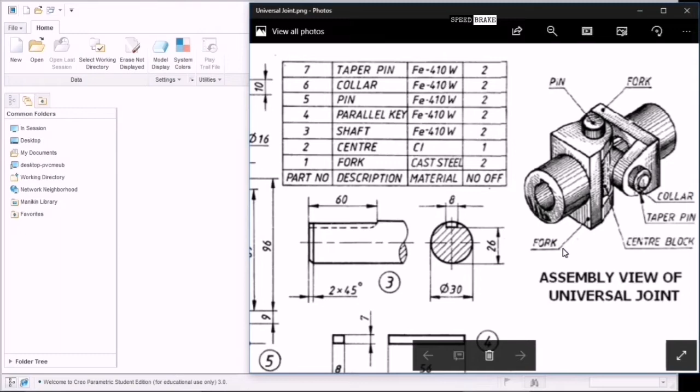This universal joint assembly consists of 7 parts: fork, center block, collar, taper pin, etc. We will initiate with fork, then center shaft, followed by parallel key, pin, collar and taper pin.

First we will try to model this fork in sketch mode in Creo. Let us explore the dimensions of the fork quickly - it is a very simple diagram. First we will model the middle part, which has dimensions of 57, 84 into 16. 57 is the width and 84 is the total length as provided, and extrusion can be provided for 16.

Meanwhile we will make the right hand side part, which is a concentric 2 circle, followed by drawing the back end and providing a fillet and rounds as it is provided, with 3 mm.

New sketch, just uncheck this default template. Before that we will select the working directory, which has all the files in it. I'm creating a new folder on the desktop, naming it universal joint, and creating a working directory. Whenever you are saving all the files, it will be saved in the working directory, and it helps in assembly also. We'll get a message: successfully changed to working directory.

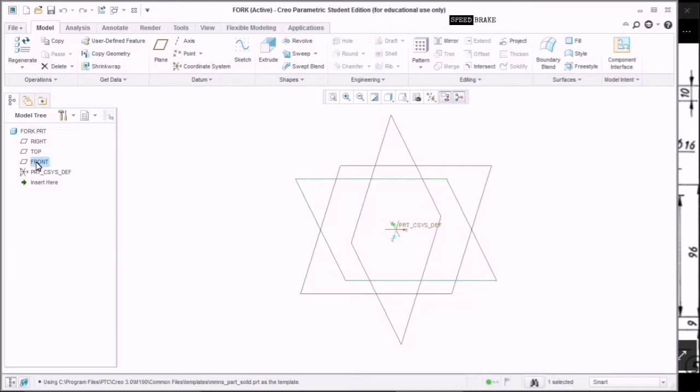Now choose the front plane and sketch view, choose sketch mode and click sketch view. Now we will draw the fork. First one, as I said, it is 57 into 84. Taking the rectangle, I am making it symmetric such that it helps me in assembly.

In assembly view it helps whenever I am trying to make it symmetric. So here it is 57, here it is 84, trying to get it symmetric - so it is 57 by 2 and here it is 84 by 2, such that if you look at this it will be symmetric to x and y axis. It helps in assembly and extruding.

So extruding, even here also the symmetry, extrude on both sides. Extrusion, it is 14... sorry, 16, okay, 16 mm.

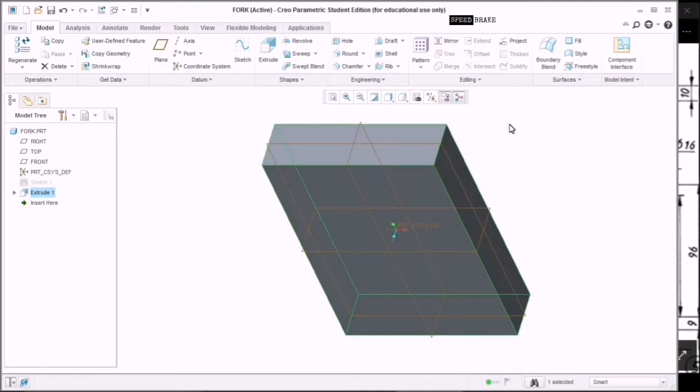Now we will just draw the next one. Sketch view, make references, taking out references. Take the center line such that the circle remains with 18 mm towards the surface - so 18 mm. Since the center line will not meet out and will not make errors, you can also use the construction mode.

So choosing the circle, and the dimension for it is 40 dia and 16 dia. I am making out two circles - so it is 16 and another one is 40.

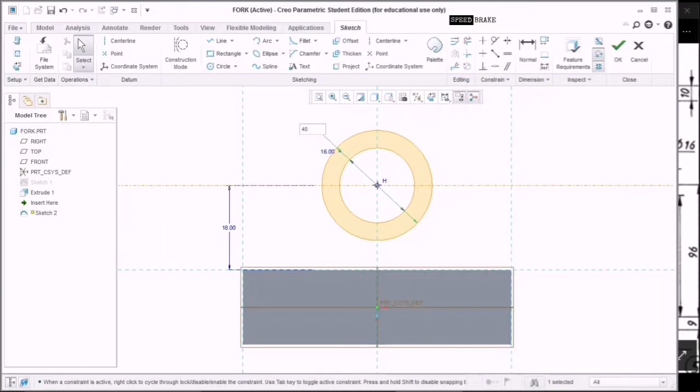Now I have to make a tangent. I have to choose this - it shows a T symbol such that it comes as a tangent. Draw another tangent line with respect to the surface which is already extruded. Now trim the unwanted surface - whatever surface is unnecessary, just remove it using the trim tool, carefully such that it won't affect the tangent line.

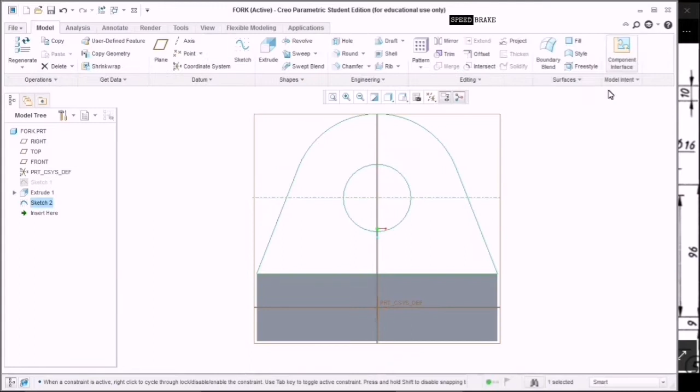Now we have to close the corresponding sketch, drawing a line towards the surface. Now we will extrude it - here extrusion is made on one side only. Switch on the arrow such that it passes to the other direction. So extrusion on one side, it is 14.

Here you could see it is 84 minus 56 divided by 2, such that it is 14 on both sides. So for one side it is 14. I'll also show you can directly input instead of calculating: 84 minus 56 divided by 2, so it is 14.

Next we will take the mirror of it. Select the extrude, choose the mirror option, select the middle plane, and you will get the mirror.

Then we'll model the backside part of the fork where the shaft can be placed. Sketch view.

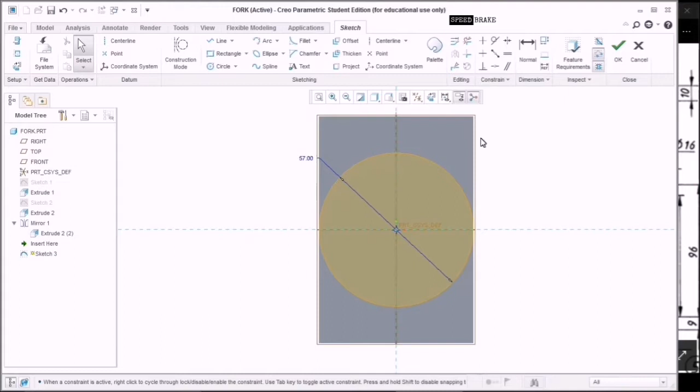Now take a circle - at a midpoint, draw a circle with a diameter of 57, as you could see here it is 57, for the diameter with an extrusion of 38. Extrude it, check for a standard orientation, so extrusion on one side only with 38.

Now we'll make a hole in this as it is represented. Sketch view - a hole of 30 diameter. Here you could see it is 30 diameter hole, so change it into 30 diameter.

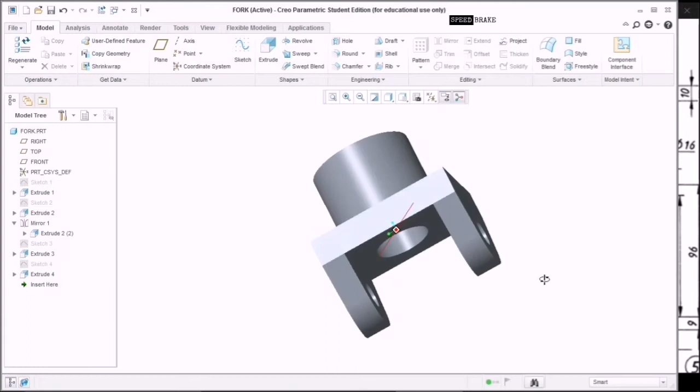So extrude it, look for a standard orientation. And now we have to remove the material. So automatically, if you are dragging it, we may see that material is removed.

Okay, we have almost completed the first component in the universal joint. Now we have to draw the axis for the key, that is, we have to draw the keyway. As it is shown, first we'll take the references for drawing the keyway.

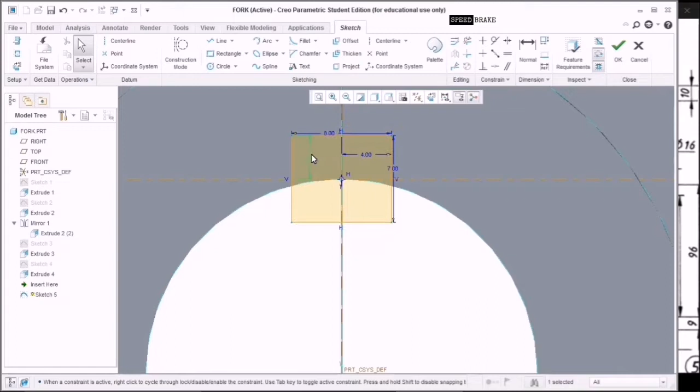Okay, clicking the reference, take the rectangle, and a center line, since the keyway is restricted as 8 into 3.5 mm. So it is 8, and making it symmetric, so it is 4, and this is, I think it is 7. Okay, 7, meanwhile it is 3.5 from the hole which is made.

So now we are ready to extrude and remove the material. So here you could see the keyway which is 8 into 3.5 made here, and the corresponding parallel key which is inserted, which consists of 7 into 8.

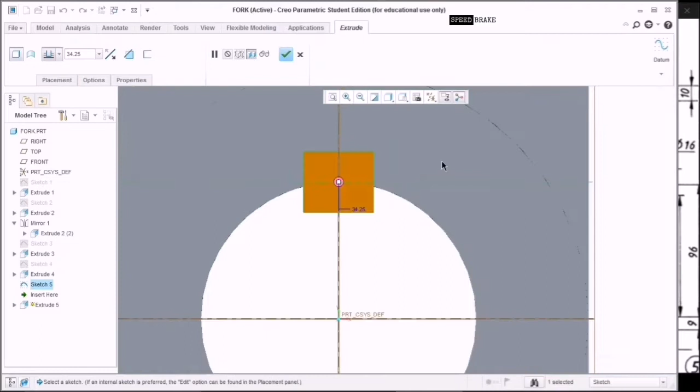So here you could see, okay, 3.5. So instead of 20, there have been some limitations. Clearly it is mentioned the keyway is 8 into 3.5, and that's why we have made it. It is 8, it is 3.5, since it is 7 by 2.

Okay, then extruding it, then switch over the directions, or we'll do this extrude on both sides, drag it and choose remove material, such that our keyway is done.

Then we will make a round. It is provided a round of 3 mm. We will choose all the parts whichever necessary, which requires a round. So it is again round, followed by the corners. Rounding is made in order to avoid sharp corners.

And that's it, we have completed making component 1, which is the fork. 2 forks are used in the universal joint, the same similar fork. Successful.

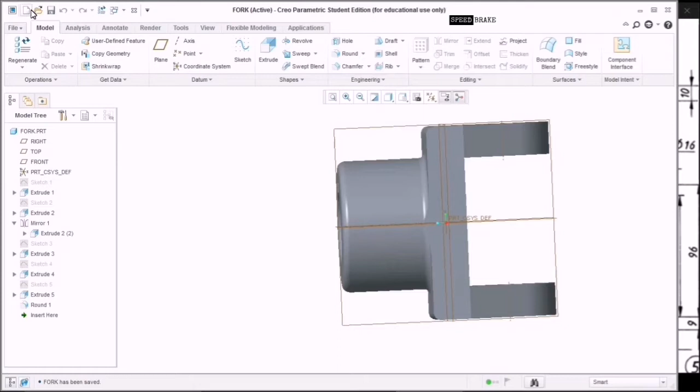So we will move on to the next one. Before that we will save it. Okay, so this is saved to the working directory. So move on to the next one, new part. It is the center block, I will name it as center.

So uncheck the default template, choose the millimeter Newton solid. Again, I'm just naming it, branding it. It is made by me, Ramesh.

So choose the front view, sketch mode, and then the sketch view. So how shall we proceed this? So we have to make 2 circles. One circle is 32 dia, another one is 16 dia.

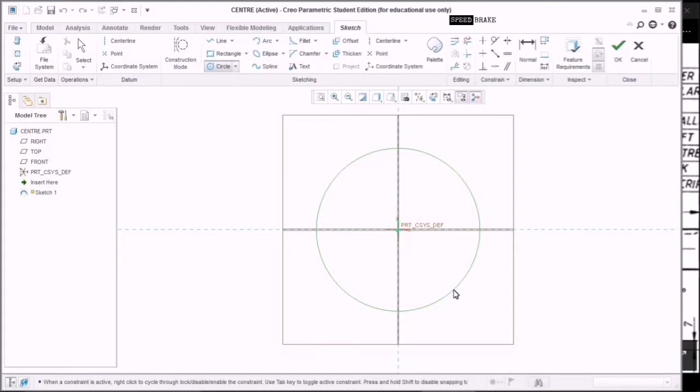And meanwhile we have to extrude it for 56. So first we'll make this center layer, and next by taking 18 as reference we'll do another thing. First take a circle, similarly another adjacent circle. So one is 32 diameter, and another one is 16 diameter.

And this extrusion is made for 56. So okay, click OK, extrude. As I said, symmetric extrude on both sides, it helps in assembly. So it is 56, extrude for 56, standard orientation. Yeah, okay.

So then select the suitable plane, go for the vertical plane. Provide sketch, sketch view. So now make a reference and just provide the dimension as 18, taking the center line as a reference and changing the dimension as 18. Okay, you may witness here, it is 18.

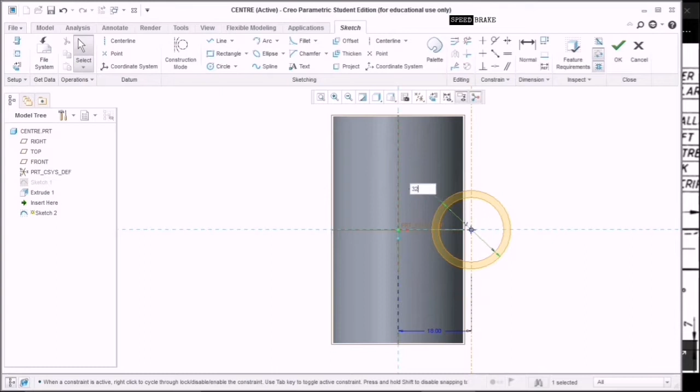So in that 18, continue the same procedures, taking the distance as 18. Draw 2 circles similar to the previous step, one is 32, another one is 16. So it is 32, sorry, 16 and 32.

So now we will extrude this. The extrusion dimension is, as you could see, the previous one. Extrude on both sides. It is 56.

Okay, now we have to remove the inner material, which blocks the way for the pin. So just choose the reference and click OK. Circle, create a circle, click OK, extrude, and then remove the material, extrude on both sides, just drag it.

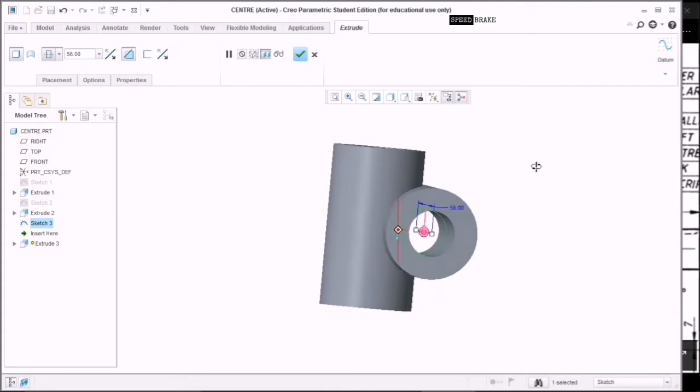Remove the material, okay, I have provided 56. You may also just drag it since we are just removing the material. Do the same one for the other similar center.

Choose the corresponding plane, sketch view, sketch. Reference, click on the center, that is circle. Circle, click OK. Again, extrude, standard orientation. Just remove it, extrude on both sides, remove material. Automatically it is done.

That's all, we have completed the second model.

Okay, now we will save this. Second center is done.

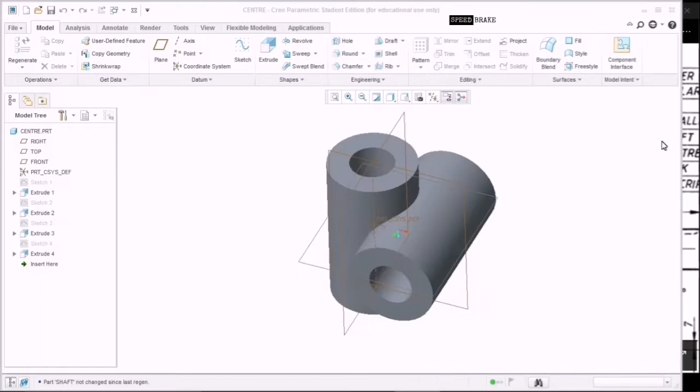The third one, new part. Third one is shaft as provided. Uncheck the default template. Click OK. And it is modeled by Ramesh. Here I made a pass and clicked the corresponding MMNS.

Better you do this. Always prefer to choose millimeter Newton solid MMNS. Otherwise it may go into inches.

We will see here the shaft, it is 30 diameter with the 60, and the other dimension is not provided. We may consider it as 100 or 120. With the chamfer of 2 into 45 degree, chamfer angle of 45, with 2 mm. It is as simple as it is.

Meanwhile, we have to make a key, parallel key. Choosing the front view, sketch view. First let us draw a circle of 30 diameter, and extrude it to 60 plus some 30 or 40. Say it is 100.

Extrude on both sides, symmetric. As I said, it is 60. We may consider plus 30 or 40. So 40. That is 100. 60 plus some space, since there is no restriction with the length of the shaft.

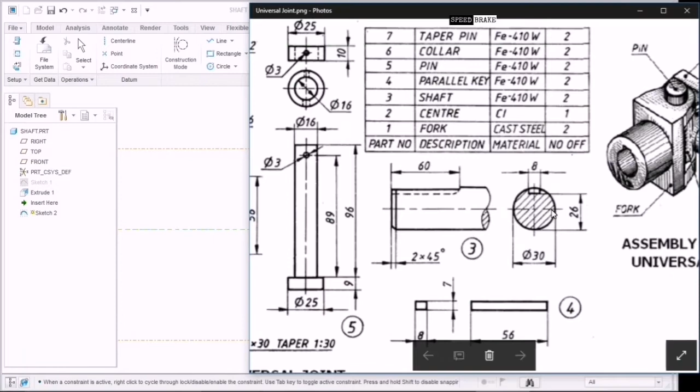I made 2 reference lines, and choosing the dimension by clicking on the 2 reference lines. So it should be 26. As it is mentioned, you could see here it is 26 and the slot is for 8.

So we will take a rectangle here for the 8 slot, making it symmetric. So it is 8 and here it is 4. So it is done. You could see it.

So it is 8 and 4, so that we could provide the key slot properly. Click on OK, extrude.

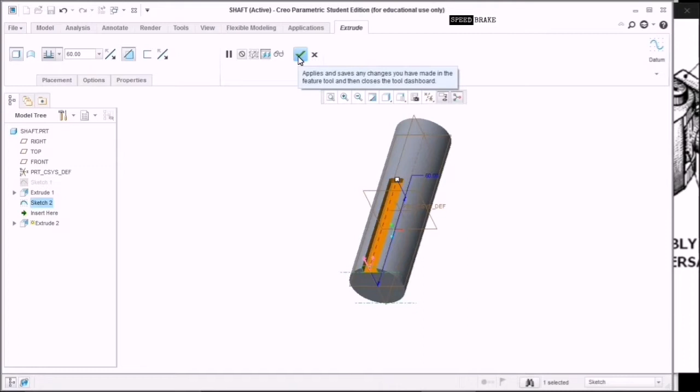Just check with the standard orientation. Change the direction and how long the key slot is to be made. It is 60 as it is provided in the diagram. So the key slot is successful.

So then the chamfer key slot is successful. You could see we have made it for 60, and another is some extra recess. There is no restriction on the length.

So now the chamfer with 2 into 45, angle of 45 degree with 2 should be made. Click on chamfer, here it is 45 into D, it is 2. Click on the edge such that chamfer is made and click OK. And that's it. Shaft is done.

The third component is done. As simple as it is. We'll save it. Yeah, successful.

So we'll move on to the next one. Uncheck the default template, rename it, and obviously the next one is parallel key. Sorry, the fourth one, parallel key. We are making the key.

It is very simple. 7 into 8 and the extrusion is 56. So name it as parallel key. Choose the default template, which is MMNS. Just make your name, it is suitable if you are making it for detailing.

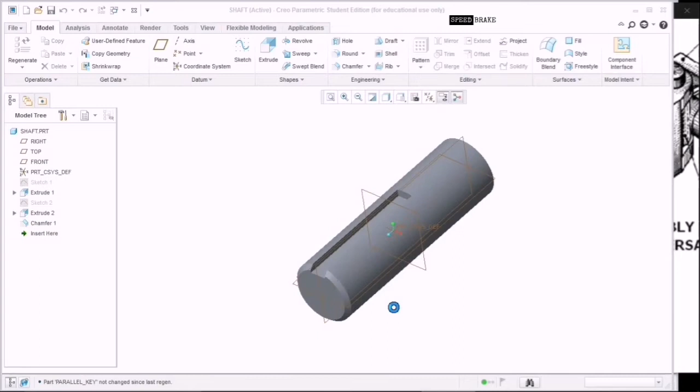Here I have passed and I have chosen the MMNS. Don't think it is in inches. Click on the front plane. Click on sketch view, sketch mode and sketch view.

So now choose the rectangle. It is 8 and 7, make it symmetric. That helps in assembly and that helps in all the other next steps during assembly probably.

So it is 7 by 2, so it is 3.5. And here it is 8 by 2, it is 4, since it is symmetric. Standard orientation, let us extrude this first.

Extrude on both sides, and the extrusion, you see it is 56. Now this is done.

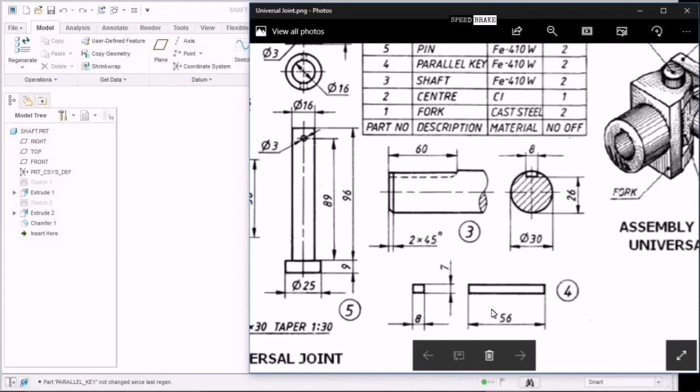Then go for the fifth one, which is parallel pin. Sorry, which is pin. So first let us save it. Save the parallel key.

Click new part, which is pin. Uncheck the default template and choose MMNS. I'm just ensuring to enter my name.

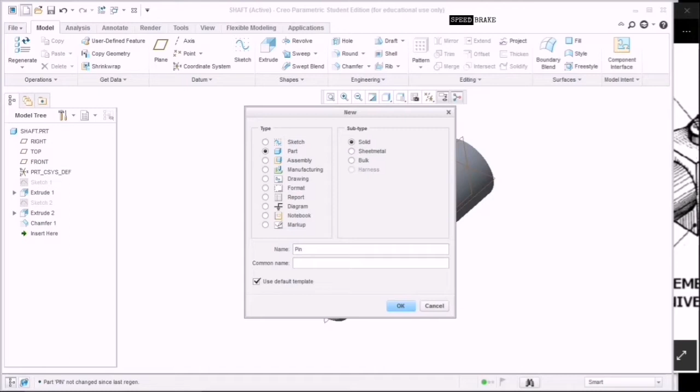Sorry, okay let us pause, because I have to choose that MMNS. I'm forgetting it. So it is pin.

Yeah, MMNS. Don't forget to do this. Otherwise, one part will be in inches, another part will be in millimeter. Okay.

Let's now proceed to model the pin. Okay, pin. So pin first, let us draw the 25 dia and model the top surface by extruding for 9 mm, followed by the bottom surface for 16 diameter. Okay. And I extrude it for 96. Okay. Front plane, sketch mode, sketch view.

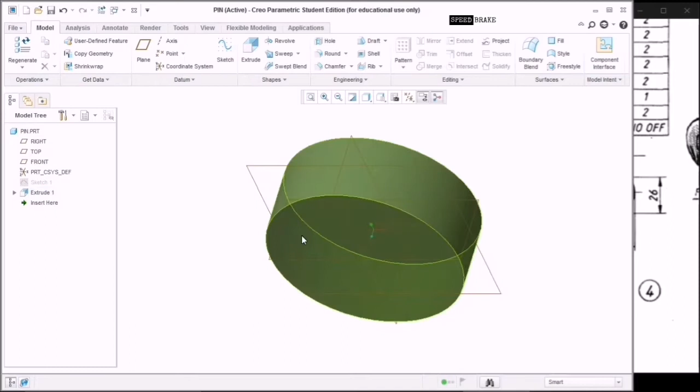Take the circle with a diameter of 25. Extrude it. The extrusion is for 9. Okay. So then let us select the surface of it. Okay, surface with a dimension of 96, with the diameter of 16 mm.

So sketch view, choosing the circle. Let us draw a sketch, changing the dimension as 16 mm. Okay, let us extrude it for 96. Okay, pin is made. So now I have to make a hole.

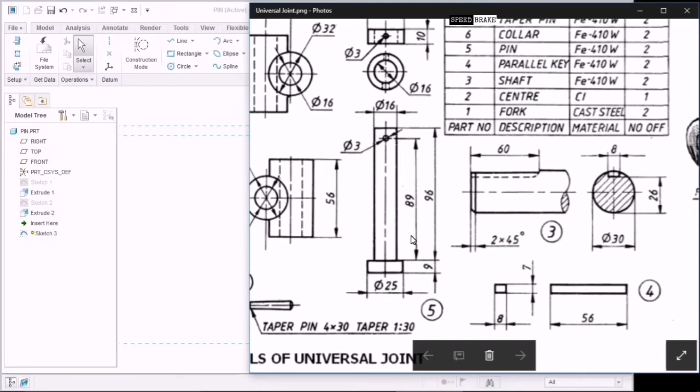You could see a hole of 3 mm dia. It provides space for taper pin to enter. Okay, choose the references. So from bottom I'll make a reference line. So it is 89. You could see it is 89. There I have to make a 3 mm diameter hole.

Okay, so I'll make a reference. I'll choose the dimension, click on the first one, second one, middle button. So it is 89. That makes it easier to make a hole of 3 mm diameter, such that the taper pin can be entered in it easily.

Okay, so extrude it, remove material, and the hole is automatically made, it is 3 mm. You could see. Okay, since it is a hole, I'm just dragging it. Okay, so hole is done, and that's it. We have completed the 5th one, which is pin. Save it. Okay, then click on new. The next part, which is collar.

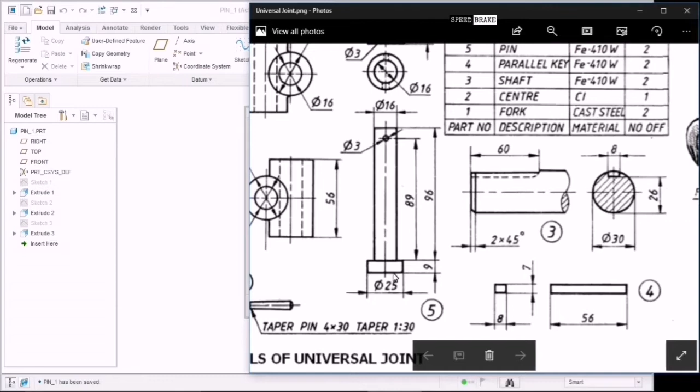So I'm just checking whether pin is correct. Okay, collar. So for collar, you could see it is 16 dia and 25 dia with 10 mm extrusion, and we have a hole for 3 mm diameter, which provides access for taper pin. Okay, it is easy. Let us now model the collar.

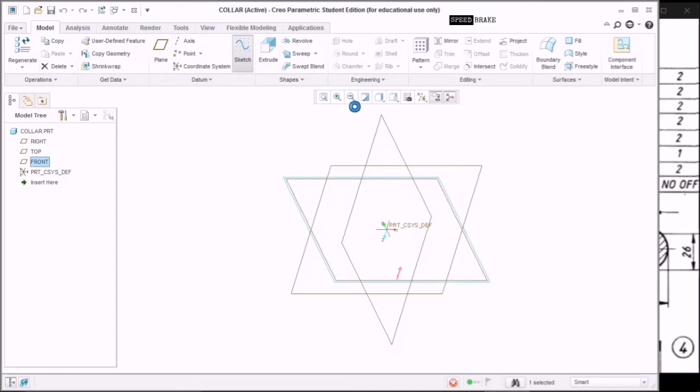We'll extrude it. Okay, extrude on both sides, and it is extruded for 10 mm. Okay, so you could check it is 25, 16 diameter and 10 mm extrusion. Now we will make a 3 mm hole, such that it provides access for taper pin.

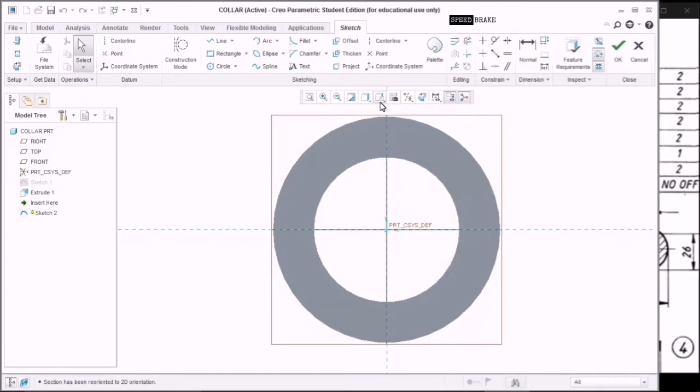Okay, let me check. Yeah, okay. So choose the plane, mid plane, sketch view. Let me check. Yeah, it's fine. Okay, sketch view. I'll click on the circle and change the dimension to 3 mm such that the hole can be made.

Extrude it. Extrude on both sides. Okay, we will drag it. Then click on this remove material. Yeah, completed. The sixth component collar is completed successfully. We will save it. Okay. So now click on the next one and check the default template.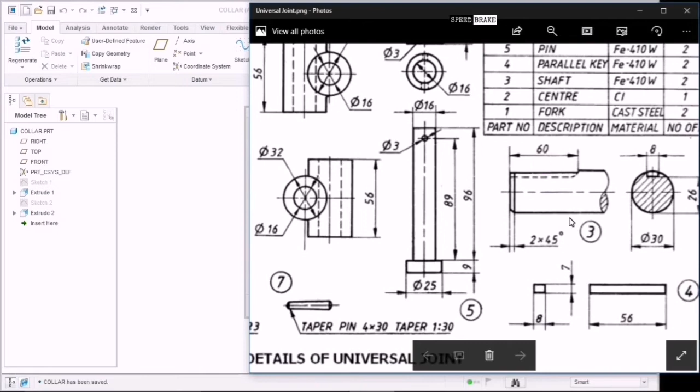Okay, what is the next one? Taper pin. As you could see, the last component. Wait, which is taper pin? Yeah, okay. One second. So for this taper pin, first, let us start. So taper pin is to be provided in order to restrict the motion. So choose MMNS part solid. Yeah, it is needless, but anyway, okay.

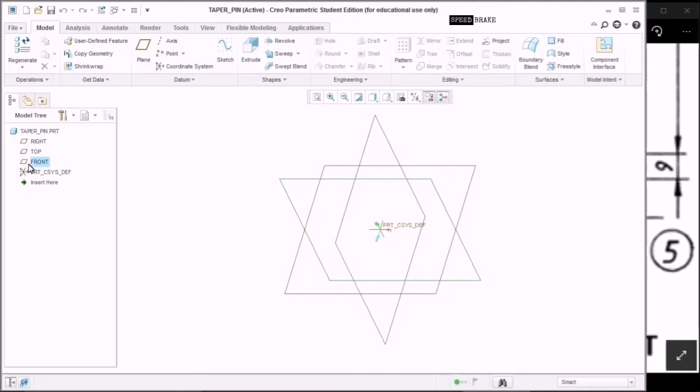So okay, let us enlarge it. So here for drawing the taper pin, you could see that taper pin is made for 4 cross 30 with the taper of 1:30. 4 represents one side dia of it, and 30 is the length. Taper is 1:30, which means for 30 length the taper will be decreased by 1 mm. Okay, so we will proceed.

Okay, so as I said, we will use the revolve command to do this taper. Since it is 4, half of 4 is 2. First we'll draw a line. A small line, and another small line. So this should be 1 mm lesser than the first one. So half of 4 is 2. Since we are making a revolve, we have to consider half of the dimension here.

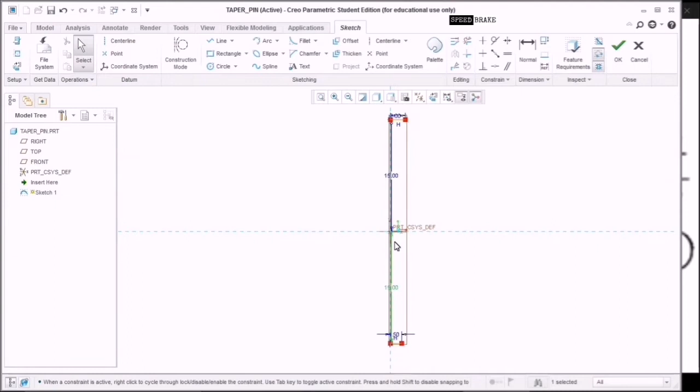And since the taper is provided 1:30, here it is 1.5. Because in the top it is 4, half of 4 is 2, in the bottom it is 3, half of 3 is 1.5. And meanwhile the length is 30. Okay, 15, 15. Anyway, we will again check with the length.

Okay, hope you understood this. We are making a taper. We'll check with the length. Okay, it shows 15, 15. Yeah, 30. That's fine. We'll delete 1. Okay.

So now we will join this using a line. Join the taper. It is a slight taper. Join it. And then connect it. In between there is no connection since it is not a closed surface. I am making a reference center line, in which reference line the revolve should operate, and after that we will connect it.

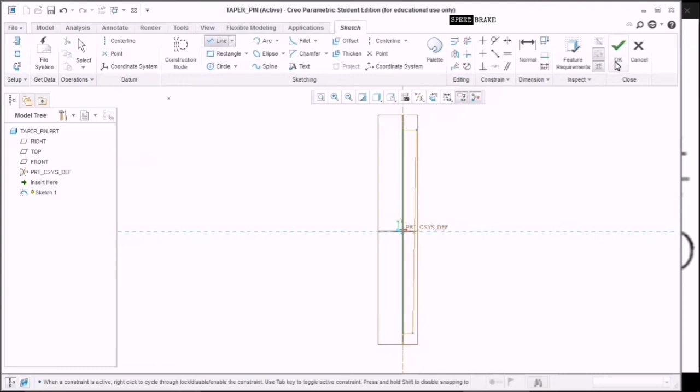Yeah, sorry. Okay, connect it. So now that's done. Click OK. You will just revolve it such that the taper pin is ready. So now we have successfully made all the, yeah, it's running, all the components for the universal joint. We will save it. Okay, yeah, done.

Yeah, what is this? Okay, no. So now we will proceed on to assembly. One sec. You have to proceed with assembly directly. Before that, let me, okay. So click on new and start with the fresh assembly. Yeah, okay.

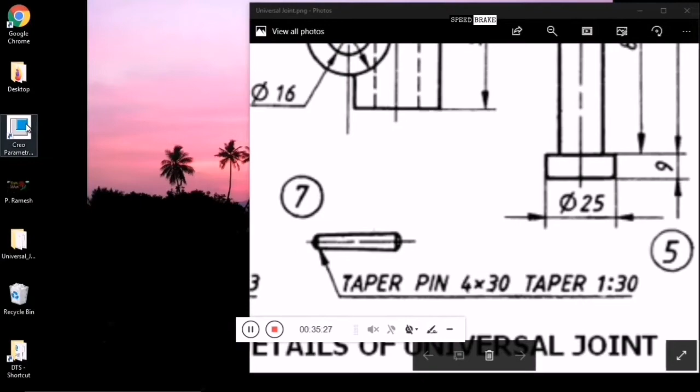I'm checking for some issue. Sometimes Creo Parametric has not been operating. Okay, click on new assembly. So providing the name as universal underscore joint. You have to provide underscore or something properly, otherwise the name will show an error. And uncheck the default template.

I'm just branding it, providing my name. So here choose inches, and here MMNS assembly design, and you may provide your name. Modeled by, and the description, you may provide an optional description such that it will be useful during your detailing process. So click assemble, click the fork and make this the default one such that other elements are framed up based on the constraints of this fork.

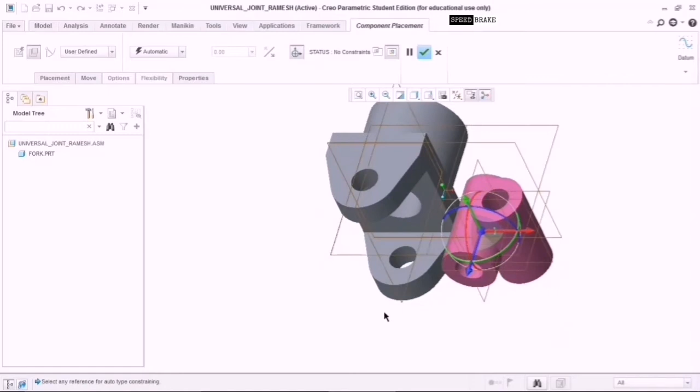Now let us import the center block. Click center and OK. Choose your convenient view such that the assembly is made as simple as possible. To whichever extent it is convenient for you, zoom it and just use the slider to rotate the direction. Click on planes. Vertical plane and horizontal plane, and using the center line or surface.

So my methodology here is based on a vertical plane, a horizontal plane, and either center line or surface in order to obtain the fully constrained option. If it is partially constrained, it won't be a good one because that's not a correct way of assembling it. So choosing the surface and surface, still it is partially constrained. Now choosing the center axis line.

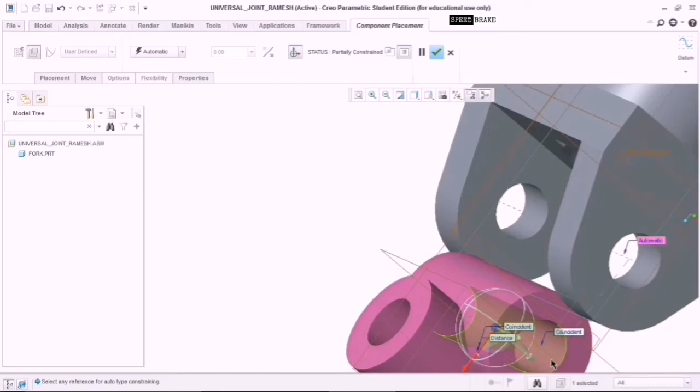Because sometimes even if we click OK fully constrained, it may change its position. So I am restricting it, making it constrained in all directions. Click on the center line and yes, this one, another center line. Okay, so now it is fully constrained. Yeah, clear.

So we will import the next one, the next fork. Click open. So just change the directions using the slider to the corresponding view where the assembly is made. Rotate the slider. So now choose the planes, vertical plane and the corresponding vertical plane of the fork. Make it coincident. And it is 0 dimension.

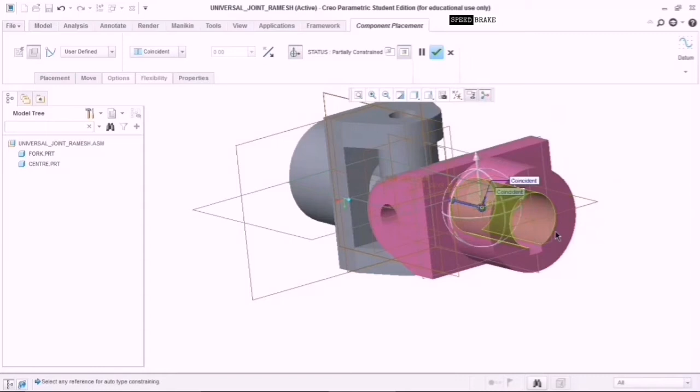So now click on the horizontal plane and the horizontal plane of the existing work-in-process assembly. Yeah, it is done. So we have a partially constrained state. Now click on the center axis of the hole towards the center axis. It is fully constrained. Clear? Okay, let me check. That's fine. There are no flaws. No errors.

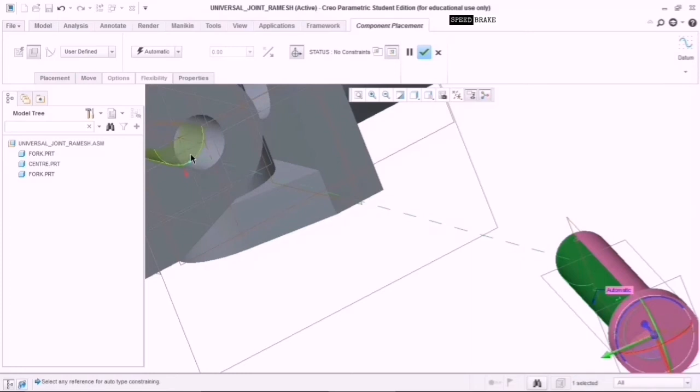So now, for importing the next one, we'll check. We'll import the next one, which is the pin. This pin controls, regulates the motion. So click on the corresponding pin surface and the hole which is made in the fork. And also the surface to which it gets attached.

Coincident is made from the surface of the pin to the surface of the hole. Since it makes the coincident, click OK. It is done. You could witness it is done. Then what we can do is we will import the collar, followed by the collar, the taper pin.

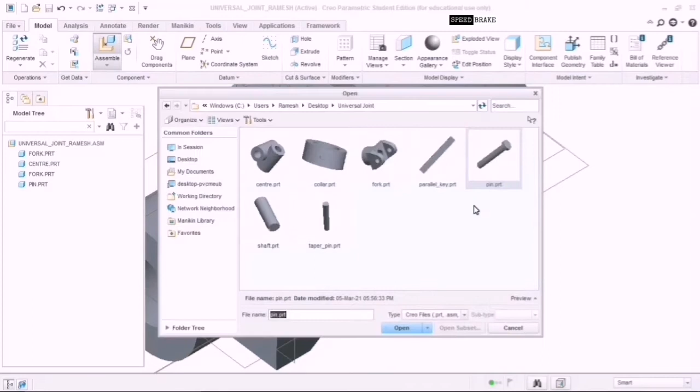Okay, collar, let me check with the collar. Taper pin, I'm taking. So, yeah. Click on the plane, both the horizontal and vertical plane. Meanwhile, we'll click on the surface.

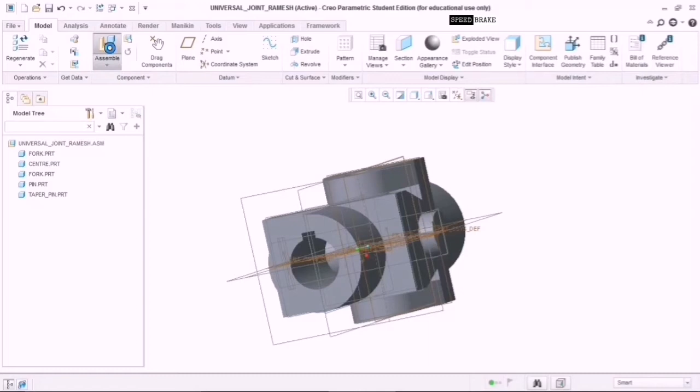Click on surface such that it is fully constrained. Okay, I missed the collar. You could see it, since we will complete it fast because we have a long way to go. Everyone can do this. You might have already learned it. My focus here is to show some detailing options. Anyway, I'll try to just assemble the shaft, followed by the keyway, fast.

Okay. So just move the direction of shaft to the appropriate directions. Fine. Click on the plane, horizontal plane to the horizontal plane, and make the distance as 0. You may follow any of this assembly, whatever assembly procedure you are convenient with: either you may use parallel, normal, or angle offset, distance, coincidence, whatever you feel convenient, you can do it, no issues.

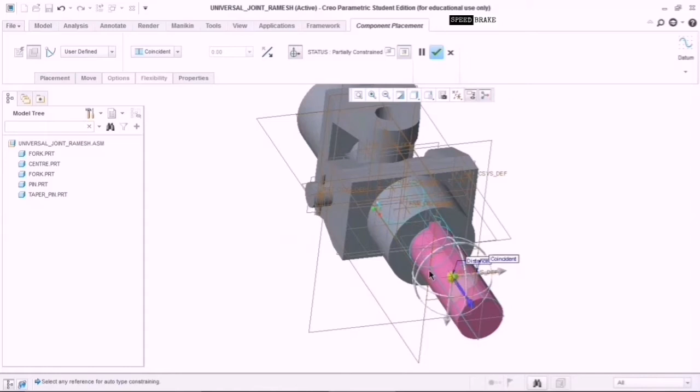Okay. So now let me just check with the surface. Now it is partially constrained. I'll drag it and provide some restriction, fully constrained, so that it helps in fixing the parallel key. Yeah, you can check here. Okay.

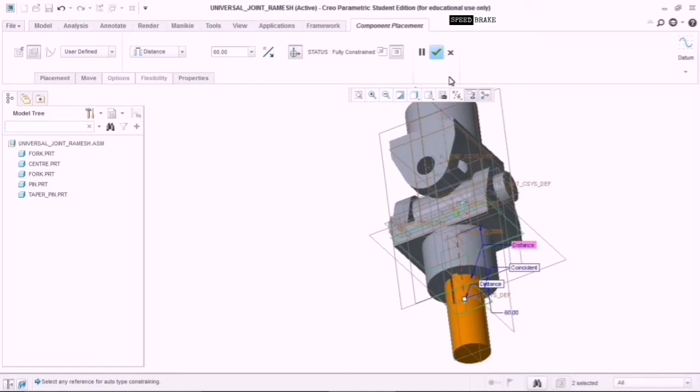So let me check. Okay, I'm choosing the plane for making it constrained, the plane of the shaft and the plane of the fork. And this distance of constraints can be controlled. So the key, it consists of 56. So here I'm making it as 60, for the total of 100. Let me check with this 100. Yeah, so that can be 60. Click on OK. Fine.

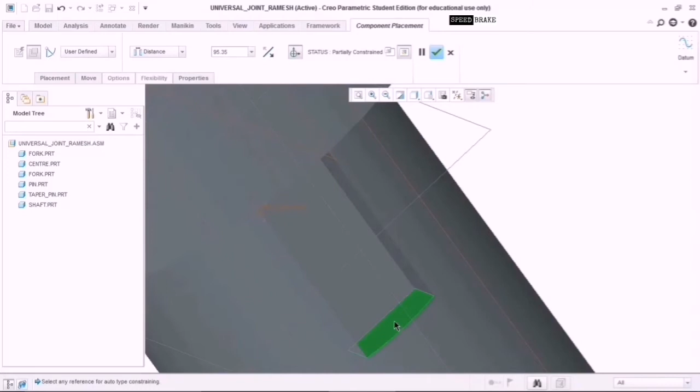Okay, so now we'll take the parallel key which restricts the motion of this shaft towards the fork. That is why we have made a slot in the shaft and also in the fork. So click on the plane. One simple assembly technique is to make it with two planes and one surface, or two planes and one center line, or else a plane with the corresponding surface. So click on another surface to which the surface is supposed to be attached. And the distance is 0.

Okay, and click on the suitable surface. I just don't want to get into plane now. Click on the suitable surface such that it directly gets attached and it is fully constrained. Yeah, good. One side it is done, and we have to repeat the same on the next. Quickly I will do this. I may not bore you much by taking a longer time in these simple steps.

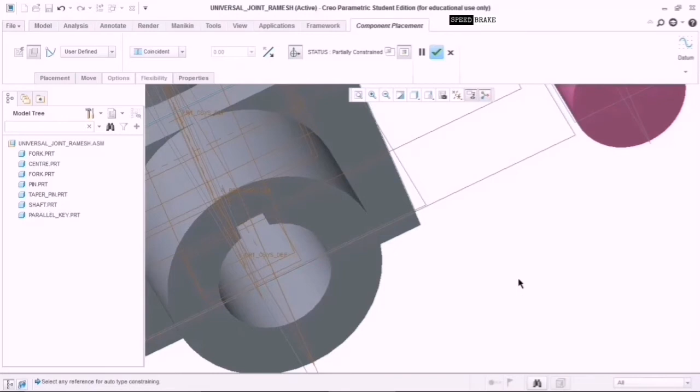Follow the similar procedure using the two plane and one surface approach. I'm clicking on the corresponding plane, and this distance can be controlled such that we may fix the corresponding parallel key at the appropriate distance. Just the same similar procedures. Click OK. Yeah, it is fine. Good. Now let us bring the other parallel key. We will assemble it fast.

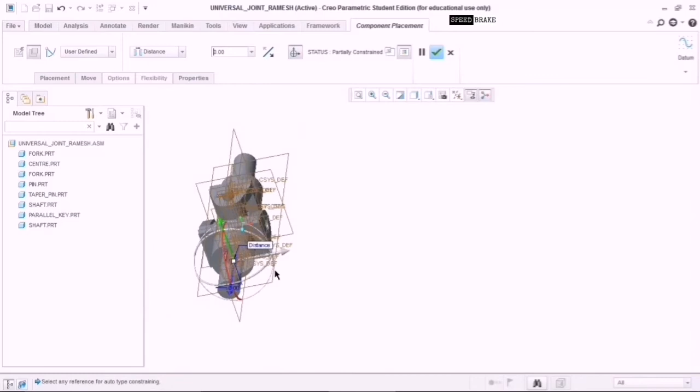Okay, first making the plane to plane contact, and then the two surface contact. So here on the left side you could see there are no errors or flaws. If there is an error, there will be a small box, or it will show it as partially constrained. So now let me click on the other surface to which it was supposed to get attached. It is partially constrained.

And another surface to which it is supposed to be attached. Clicking on the next one. Yeah, fully constrained. So now that's it.

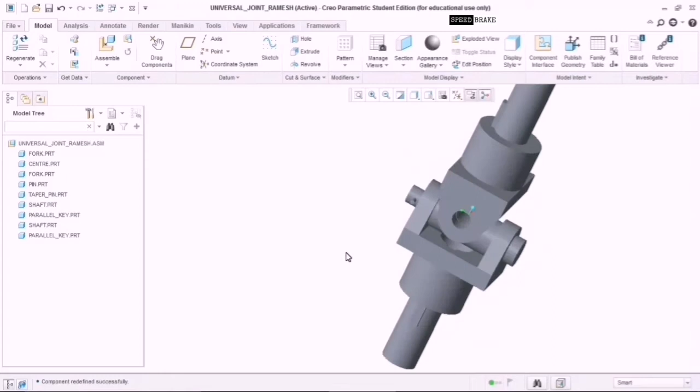So now, in order to improve the appearance, we may add some colors. You may see we have successfully assembled it. We may improve the appearance by differentiating one part from another in the whole assembly by using colors. Let me choose green for fork. Click OK. Then choose some other color, say brown for center block. Click OK.

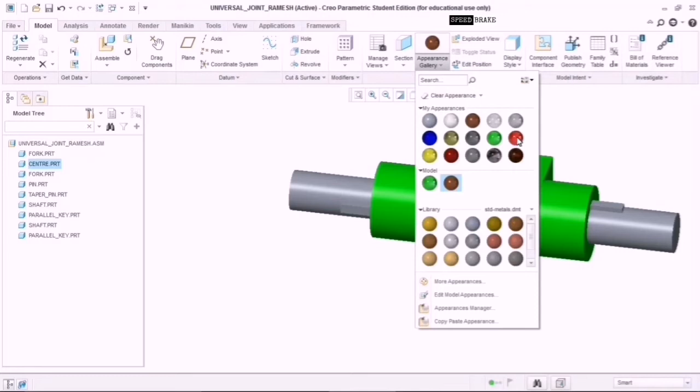Then let us choose red for the shaft. Since it seems to be full green, we may choose some other color. We may choose blue. So likewise you can choose colors for each and every individual part. That helps to differentiate one part from another among all the components. Choose the pin, and you may choose any color. And the last one, taper pin.

Okay, yeah, it's fine. So appearance, that's how we improve the aesthetic, but it seems to be similar.

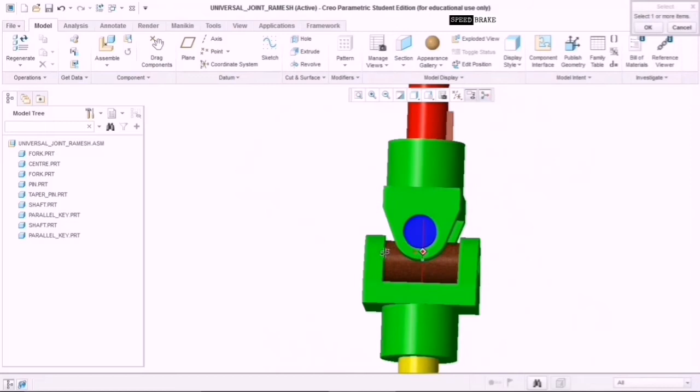So this is how our universal joint operates in the transmission shaft in the automotive. It's absorbing shocks and any sudden intermittent shock loads during the power transmission. Okay, yeah.

So what we do next, before that, let me change the color of one fork since it fully looks like green. It gives some differentiating appearance between one body and its counterpart. And that's it, we have made the assembly. We will save it, and now we will move on to the next one,

which is detailing. In detailing, whenever we produce the output, we should show it in a detailed view or an assembly view, like in a drawing sheet. Okay, choose the drawing, name it at your convenience. Here I am going with the empty format, choosing landscape and A4 sheet. There may be predetermined formats too.

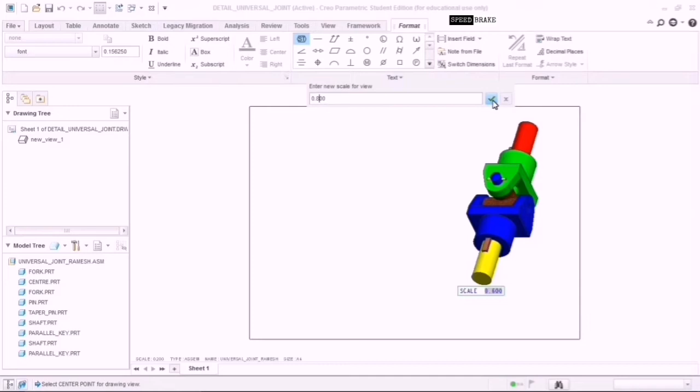In the view display it may show wireframe, hidden and no hidden styles. Choose it appropriately. I'm choosing the display style as phantom so that it shows its edges properly. You can change the way it looks. Now it has been scaled to 0.6. You may increase it if you need. I'm just increasing it to 0.8. Fine.

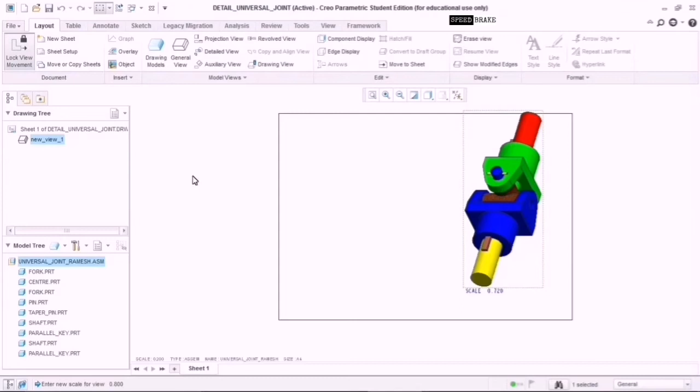So increase it such that whenever we make a print of it, it fits within the corresponding sheet. If you decrease the scale value, it looks very small when you make a print of your drawings, your model. Okay, so I'm just trying to reduce it. I'm providing it as 0.750. Still I'll reduce it to 0.720. Yeah, now it fits within the landscape A4 sheet.

Click on the assembly, click on projection view, you will get projected views, that is right side view, front view, top view, bottom view, and so on. So top view. You may get a clearer idea if we change the way it looks. Instead of the default isometric orientation, you may prefer some other orientation, either front, back or left, such that everything automatically changes according to the position.

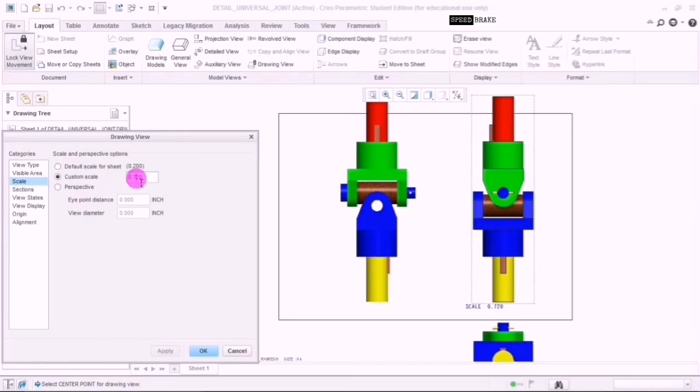You may see now for the front view how the right side view and the top view look. There is an option, you can change it and present it in such a way. See the left side view of it. We will also see how it looks in the top view and in the right side view. And just reducing the scale. Reducing the scale of the parent assembly reduces all the projected views, as you could see. Just exploring these facilities in Creo for you. Okay, so again increasing the scale value.

So now we will annotate it, that is we will provide dimensions, automatic dimensions. Click on the part, click show model annotation. It will provide some dimensions. Normally we won't use this for an assembly, but for individual parts we will. Anyway, I'm just showing it here. We will check it again with each individual component of the universal joint. So we'll delete this. Now we have our full assembly.

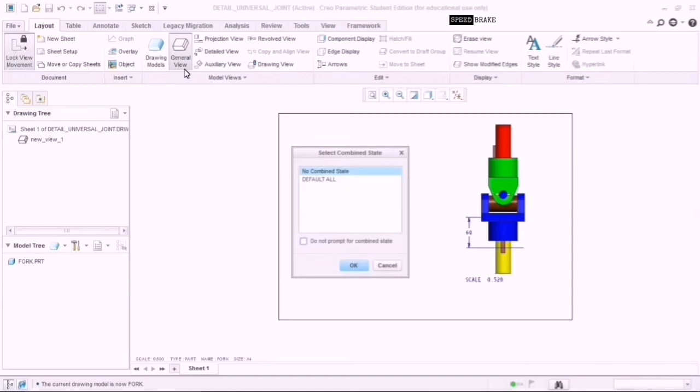And now I'll import the fork. Click general view, click OK, click a point so that the fork is imported, and use the scale and the view display to change the style of the component. I am clicking shading with edges and phantom so that all the corners are properly shaded with the edges. I am increasing the scale: instead of 0.5, let us provide 0.7. Click OK. Clear? So in detailing you have to import each individual component.

Now we will project this: top view and left side view, the individual projection views. We may change the default orientation into some other view so that all the projected views change automatically. If I modify the view orientation, you can see it automatically gets modified. Okay, yeah.

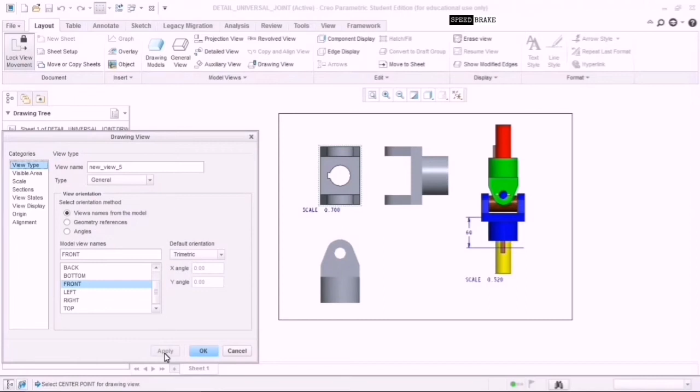You can also do the model annotations here. Automatically, individual dimensions are annotated. We will do that. Okay, it asks for corresponding changes. Okay, so now what we can do is click on the part. Before that, let me check. Okay, yeah, annotate. It shows all the dimensions of this component.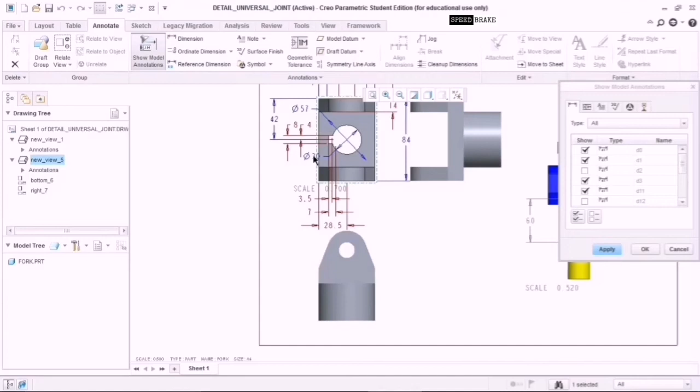So here, first it will be in red. You choose what are the dimensions which you want. It turns into blue. Okay, that makes it a strong dimension, and it is visible in the drawing sheet. All those functional and needed dimensions that are to be communicated can be selected. So individual diameters and the length. Here it is 57, here it is 30. Let us select this 30 also. These are the major dimensions that are necessary. Let us click apply, and cancel it.

So all the other dimensions are gone. Now I can adjust the dimension. Click it and just drag it. You can adjust the dimension within the sheet, within the corresponding suitable space. Just click it and drag it, adjusting all the dimensions to the convenient space. These are just to communicate the dimension. In detailing, we are supposed to do this activity. That represents detailing of each and every individual component in your whole assembly.

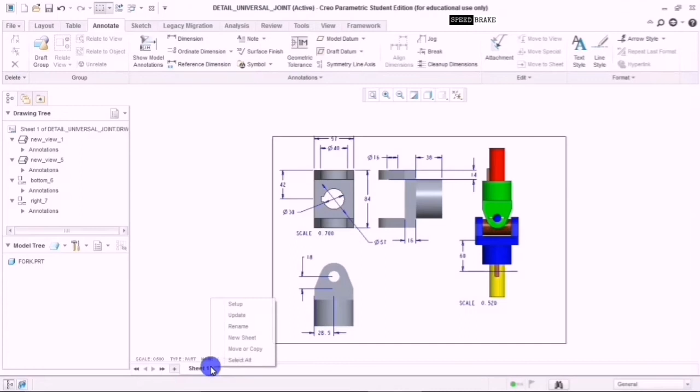So I'm clicking. Whenever you click it, that makes a dimension whichever you need to be communicated, and do the same thing for the other projected view. This is how you have to provide your outputs. This is how we used to show it in the record, in the document. So adjusting the dimension within the drawing sheet. Okay, so this is for the fork. You can utilize one projected view for each individual part. Let us take another sheet to do some other similar activity related with the fork.

I'm making a master representation of the universal joint, sitting in the center. Now click on general view, click no combined state, click OK at any point. The view will appear. Changing the view display, let us try something new: no hidden. Eliminating the hidden view, instead of solid it shows a wireframe without hidden lines. Now let us try to import almost all the other components in the universal joint. Click the suitable component. Let me try with the fork. Click on general view, click OK. You'll get a fork.

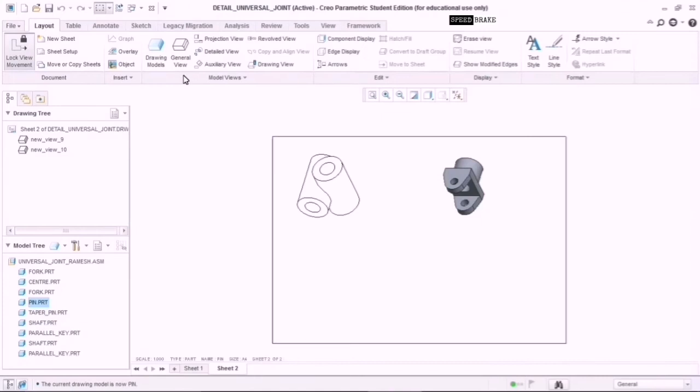Follow the same; you can improve the view display using a few options. You can try a few options. Normally it is advisable for you to choose the wireframe with no hidden. Okay, so in a similar way we'll try to bring the other components.

So you have to represent your outputs after completing the individual component parts: after modeling, making the assembly, import it into the drawing sheet, import all the different components, make annotations, that is, do the dimensioning in one sheet, which represents the detailing. And in another sheet, complete a full assembled view along with the title block, your register number, name, and the component heading which you are working with.

Let me add some more components. If there is no space, you can change the scaling, either increase or decrease to a suitable scaling. I am trying to scale and improve the overall view. Drawing model, set model, collar, click general view, click at any point and click OK. So you get a collar. This collar, I have missed it actually. I thought it saves time, but it is very similar. Again, choosing two planes and choosing the surface which provides a hole.

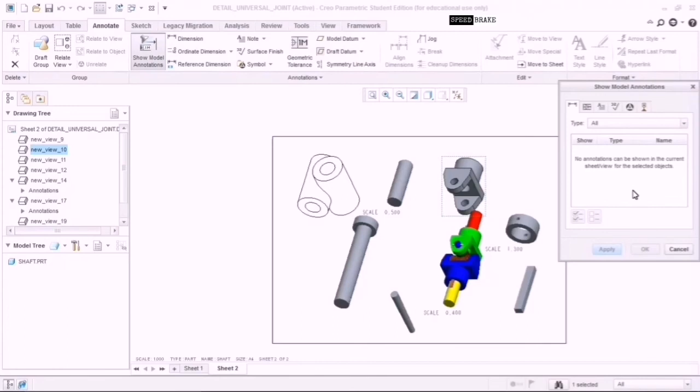As we have explored previously with the fork, click on fork, choose model dimension, fork, choose model dimension. It will show you all the different types. Let me check. I'm choosing assembly.

So the same similar procedure how we did the annotations, let's make it. Just click on whatever dimension is needed, click apply, such that it shows the dimension. We may adjust the dimension within the sheet or to the corresponding space which we feel convenient.

This is for tolerance. I'm just trying to change the orientation, and actually the annotations were left, but again we may bring the annotations back, no issue.

Click it, show model annotation. Now click on the suitable annotation which you feel is necessary for communicating the design dimensions. I'm clicking the 16, 32 and 56 - the important two dimensions for the inner hole, and the extrusion length 56, and clicking OK. I'm trying to change the position of the corresponding annotation such that it seems legible after printing it.

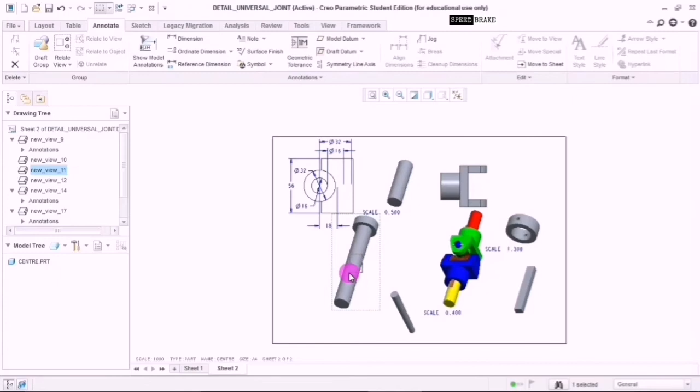So for an example, I'm just showing the model annotations for the center block. You may just do this for all the different components, based on the space restrictions within the sheet in which you are taking the printout for further communication.

Since I'm just explaining it, I'm choosing some appropriate important dimensions in the annotations mode.

So if you are clicking it, it turns blue and it will be shown in the sheet, the drawing sheet. Otherwise it automatically gets hidden, it is cancelled.

I'm just trying to change the position of all the annotations, all the dimensions. Through this you can just click and shift the position of all the dimensions.

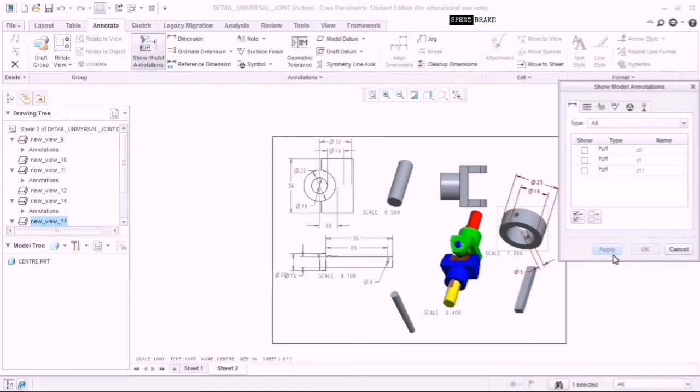choose the model annotations. It shows the annotation, that is the dimension 16, 25 and the hole diameter of 3mm. Click OK. You can adjust the corresponding dimensions or annotations.

Since it may be a lengthy one, you can just fast forward it using the option, up to 1.5 or 2 times something. Since this is the first one, I am doing it a little slowly so as to make you understand and familiarize with the basic tool.

So utilizing the projection option and annotation option helps a lot in detailing the view in a sheet, which helps in communicating your design for the various components, whether the component is to be manufactured or fabricated. Provide suitable dimensions. Enough communication has to be made.

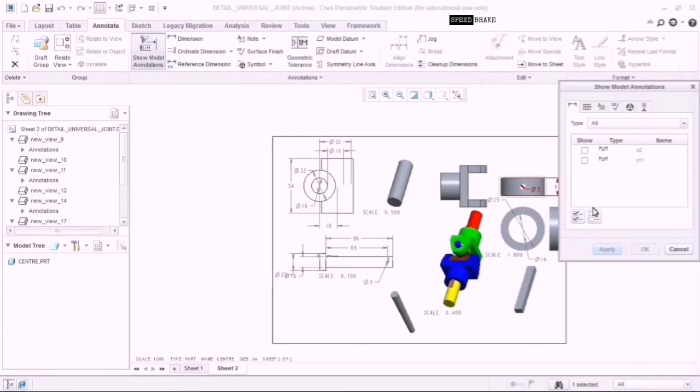Similarly the extrusion dimension and the diameter of it. So the purpose behind it is to communicate the proper dimensions which are necessary for the downstream process - either if you are giving this sheet to the manufacturing team, such that they won't be ambiguous, won't get confusion in any dimensions.

Now let us look at how do we bring the general assembly and how do we make the title block, bill of materials. It is an essential one, very important one.

I'll enlarge it, zoom it using the scale option. Oh god, it is the maximum one. Let us reduce it to 1 or 0.8. So it is 0.9, let me try - no, it is not fine.

So 0.8, yeah - for 0.8 scaling it fits within the sheet, shading with the edges and phantom, edges will be shaded, it is displayed properly, aligned properly. Click OK.

So this is how wireframe looks like and hidden looks like. You may just check how it looks like in wireframe and hidden. Whenever printing, it is supposed to be printed with hidden lines or non-hidden lines, no hidden.

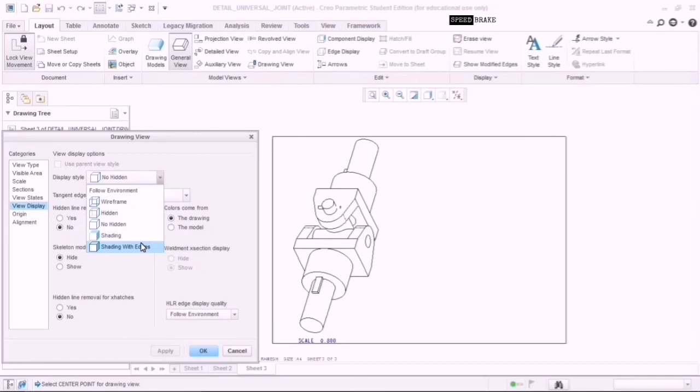Since it makes it interesting, I'm just using the shading with the edges. But while printing, always it is preferable to use either hidden or no hidden.

Now we will watch how to make a title block and bill of materials. Click on table, so it has serial number, component name, and quantity. I'm clicking on the 3 important components to see how it is auto generated. It is 3 cross 3 initially, later we will repeat the region. So it is 3 columns, 2 rows.

Click on the first one, double click it, and you can edit it. I am typing it as serial number, then component name, the name of the individual part. Since it collides with the next column, we will adjust it later, adjusting the column width and table width. Double click it, the last one is quantity.

Now just select it, adjust the height and width. Click on width, it is 1.3, adjust to some 2 or 3.3, so 2.3. Drag the table such that it is positioned within the drawing sheet.

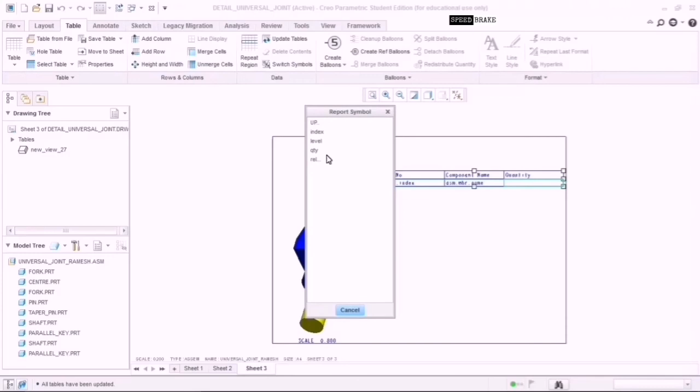For the first one, click on report and click on index. Second one, click on component name, for that it is assembly, ASM, member and name, ASM MBR name. And the last one, click same RPT, sorry it is quantity, QTY. So the first one is rpt.index, last one is rpt.qty.

Switch symbols. When you click switch symbols, you will get all the component names. But you could see here there are two components, parallel key is 2, fork is 2, and the quantity is missing. So click on repeat region, click on attributes. After clicking attributes, click on the first cell and provide no duplicate. Click on no duplicate, click done return.

So now it is updated. We have got one center, 2 fork is utilized in this assembly, 2 parallel key is used, and 2 shaft is used. You may notice collar is not used- we forgot to do it, but while drawing it, please ensure that you assemble the collar without fail. And just adjusting the properties.

Before that we will add bill of materials. Bill of material balloons are automatically generated. Click create balloons and all, like in the dimension annotations, you can adjust the corresponding balloons. For convenience, click on the balloon and just adjust it.

You may see here in the serial number, first is center, and this balloon shows where the center is being assembled in the whole assembly. The fifth one is shaft, you may see the fifth one showing the shaft. This is auto generated.

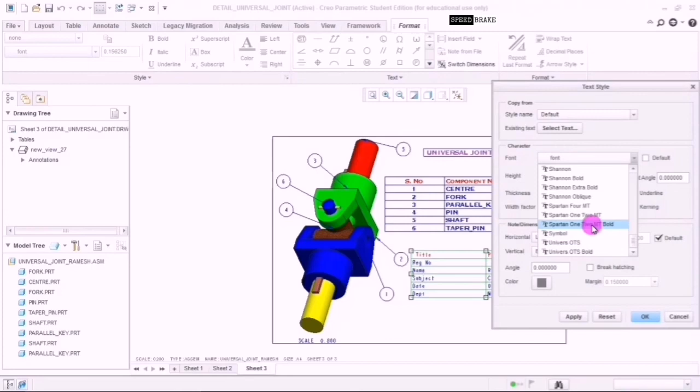Select the entire table. I have to choose the text style, format text style. Uncheck the default, click the font, and go for Spartan One Two MT Bold. That looks great, but I have to move the entire table so that it fits within the drawing sheet.

Let us increase the width of this table to some extent. Height and width, increase the width. Let us say it is 3, we may give 3.2. No, that's not fine, we may have to increase it further. Let me check, okay, 3.4, 3.5, yeah it is sufficient, but we may increase it further to 3.6 and adjust the table.

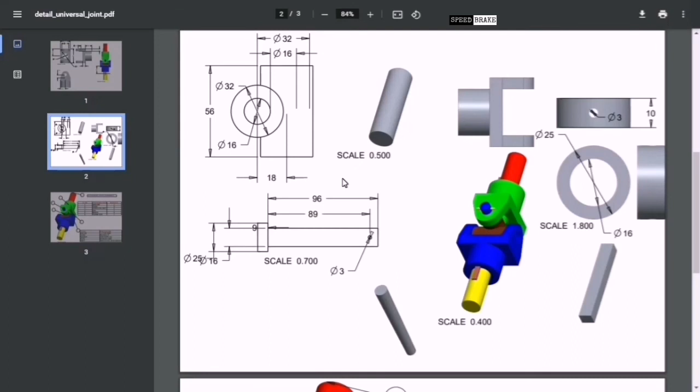This is how we will be presenting your work, your model, with the exact bill of material and the exact ribbon balloons, and this is the output file. After exporting it as PDF, you will get your output PDF file in this way, looking legible and neat for your record, documentation and presentation. I hope you understood clearly.